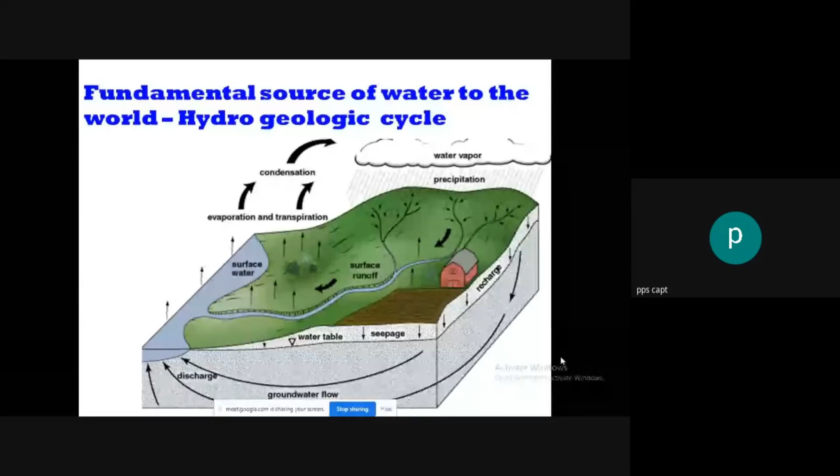Is there any audibility problem? No, sir. Continue. Audible.

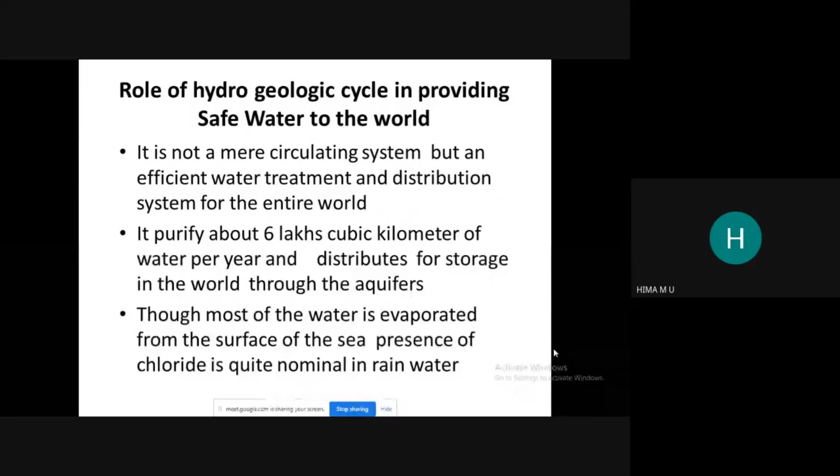Okay. Role of hydrogeologic cycle in providing safe water to the people. This is a different perspective. Actually, it is not a mere circulating system. Generally, we study it as evaporating water from the surface of the earth, and we are getting it as rainfall. That is our basic perspective. But I am giving a different perspective that it is not a mere circulating system, but an efficient water treatment and distribution system for the entire world. I hope it is easy to understand.

Whatever water is evaporated from the surface of the sea and by transpiration, it is being distributed all over the world. It is a pure purification. What we are getting as rainfall is pure water, whereas what we have in the sea has a lot of salts. It purifies about 6 lakh cubic kilometers of water per year and distributes it for the complete world through aquifers. During the rainy season, we are getting rainfall, and the rainfall is stored in the aquifers that we consume during the summer season.

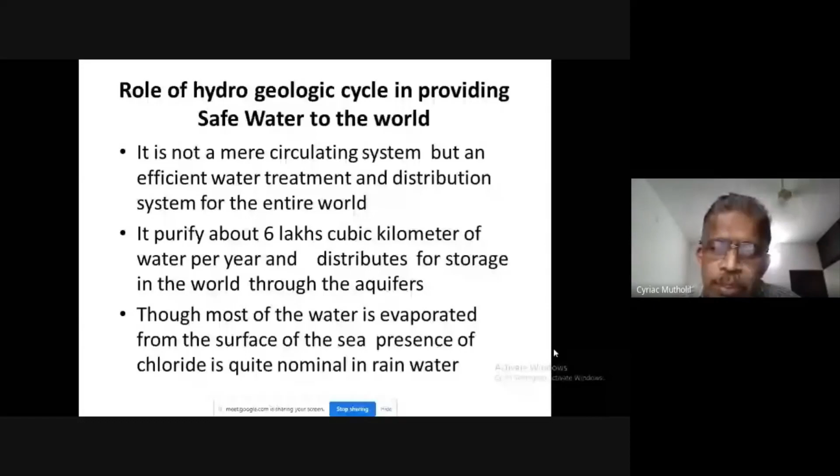So most of the water evaporates from the surface of the sea. The process is quite known. Even though the seawater has a lot of salt, what we are getting is fully deprived of any salt. These are the aquifers. Nature is storing the water in the aquifers.

And finally, I like to say that the hydrogeologic cycle is one of the most prominent processes, without which existence of life on Earth is not possible. It's a very, very important aspect. If there is no water in the world, it cannot survive. There will not be any life on Earth. It is invariably a gift of nature.

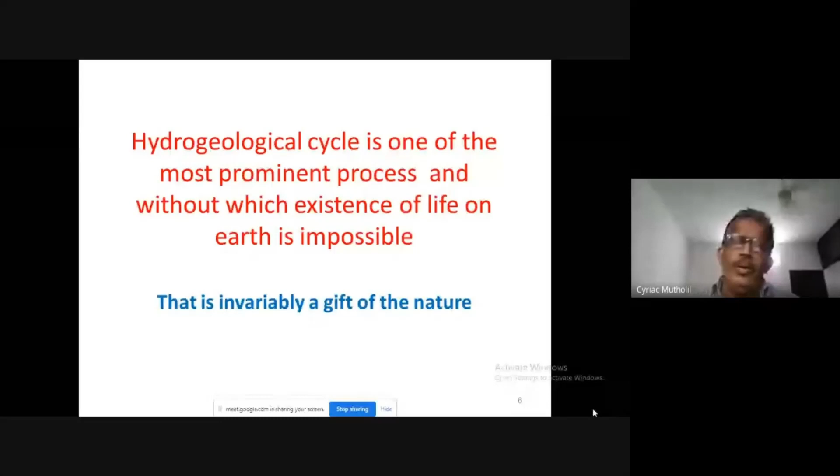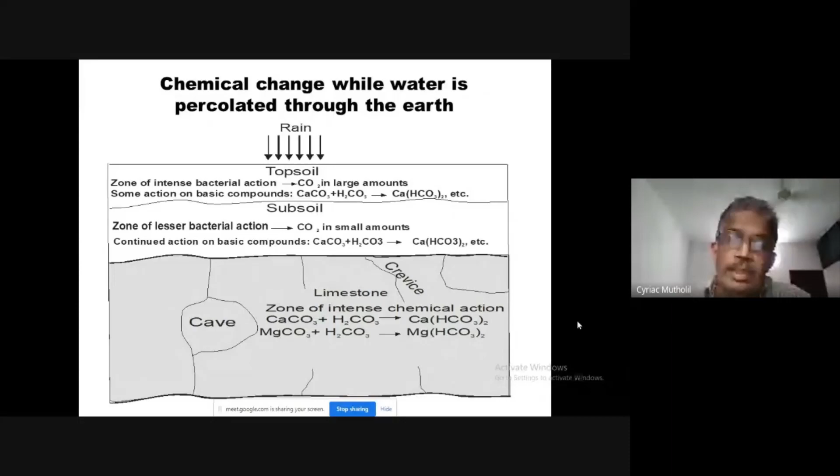In the top layer, calcium bicarbonate is formed. In the second layer also, the same activity takes place, but to a lesser extent. There also we can see that carbon dioxide is there, and calcium carbonate, carbonic acid, calcium bicarbonate. When it goes still below, the same chemical reaction takes place: calcium carbonate and carbonic acid give calcium bicarbonate. And from this figure, you will be able to understand that it contains a lot of calcium bicarbonate and magnesium bicarbonate.

Initially, it is acidic because of the carbonic acid present, but as it percolates down, it is being consumed. The pH will be more, the hardness will be more, and all the minerals dissolved from the earth will be more. But in the surface water, it will be less. I invite all of you to pay attention to this. We will be discussing this again.

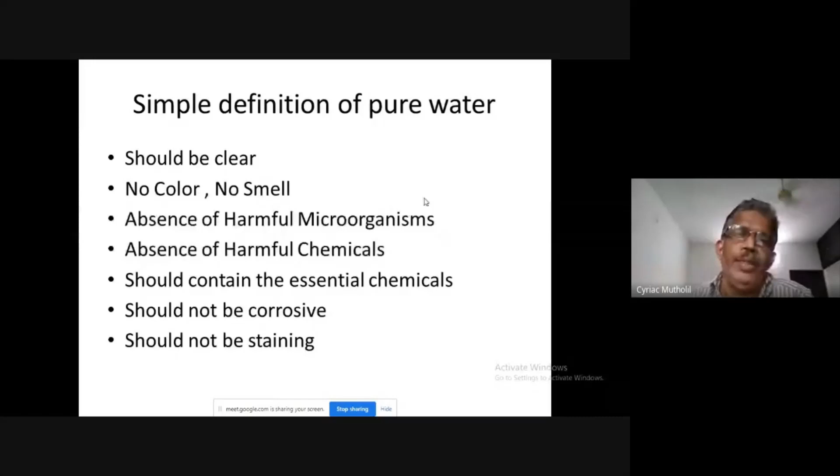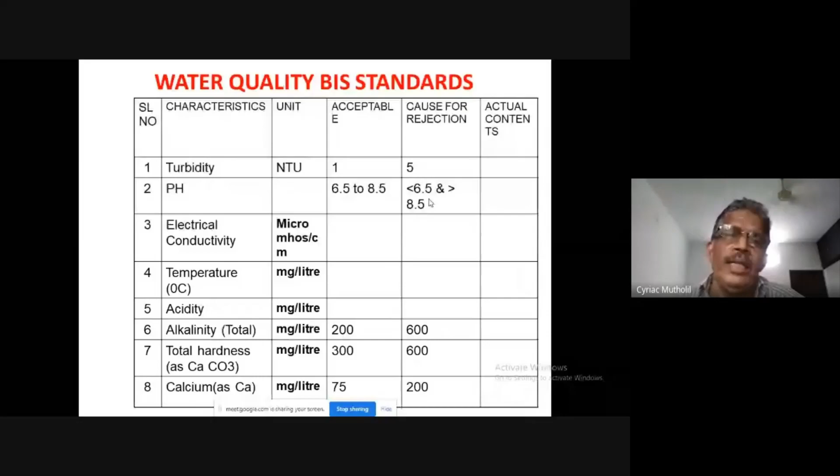And based on this, we have water standards by various organizations. This is the BIS standard. What we intend is the water should satisfy all the conditions. Then only it will have the quality as this. I'm not going deep in. I hope you are aware about this. So I'm not going deep. The issues that we face all over the world are shortage and pollution.

Oh, hello. Sorry, video on off.

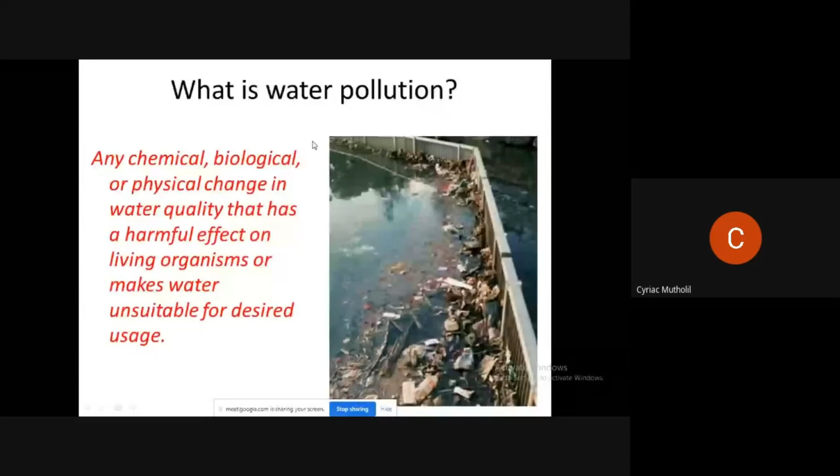And because of the pollution, the quality of the water will change. Because the quality of water will change, physical changes will be there. Changes in the physical quality of water, such as color, taste, turbidity, etc. Physical quality will be changing, and the chemical quality will be changing in chemical characters such as hardness, fluoride, chloride, nitrate, arsenic, iron, etc.

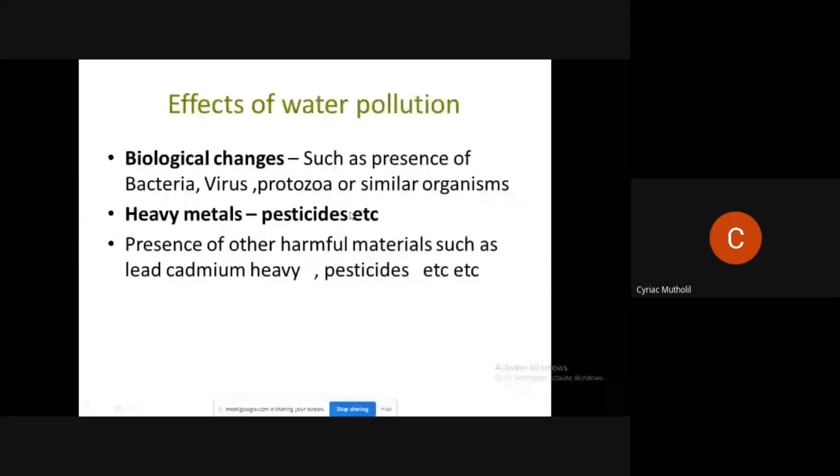Also biological changes such as presence of bacteria, virus, protozoa, or similar organisms, and also heavy metals and pesticides. All those things will be coming in the water. So the water quality parameters are divided based on this. Water quality parameters means physical parameters, chemical parameters, biological parameters, heavy metals, everything is there. And this is the general scenario of water. This I have taken from a presentation slide.

Every 8 seconds, a child dies from a water-related disease. 1.8 million children die each year from diarrhea. 4,900 deaths each day. For children under age 5, water-related diseases are the leading cause of death. At any time, half of the world's hospital beds are occupied by patients suffering from water-related disease. India loses 90 million days a year due to waterborne diseases, costing rupees 6 billion in production losses and treatment.

After economic calculation, what they say is that every rupee invested in water and sanitation gives an average of rupees 6.80 in returns. Why we are telling like that is, if you are spending money on water treatment and water sanitation, you are able to save a lot of money. That is, for every 1 rupee we spend, we are able to earn rupees 6.80 as returns.

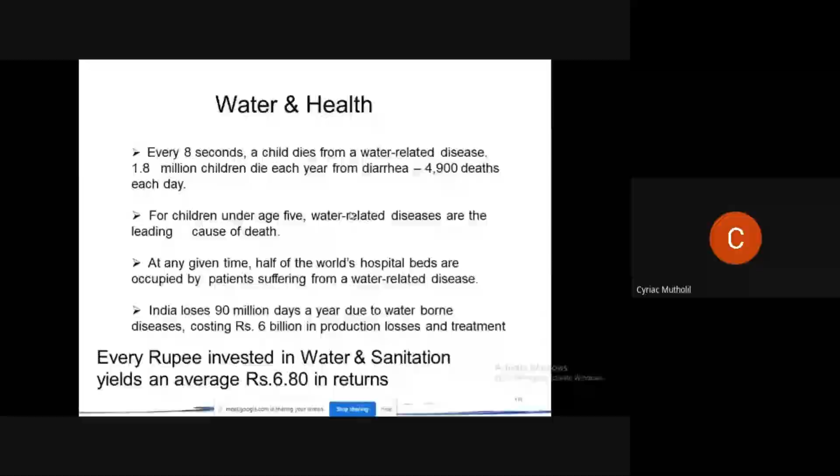Then now we can see some critical water quality issues that are causing problems. Here I would like to say that some of the water quality issues are apparent. Apparent means they can be sensed by our sense organs. For example, these 4 are not in that category.

Microbial pollution is generally tested for coliform. Coliform presence cannot be identified by our sense organs. Fluoride cannot be identified by our sense organs. Nitrate also cannot be identified. Arsenic also cannot be identified. All these 4 are serious water quality issues.

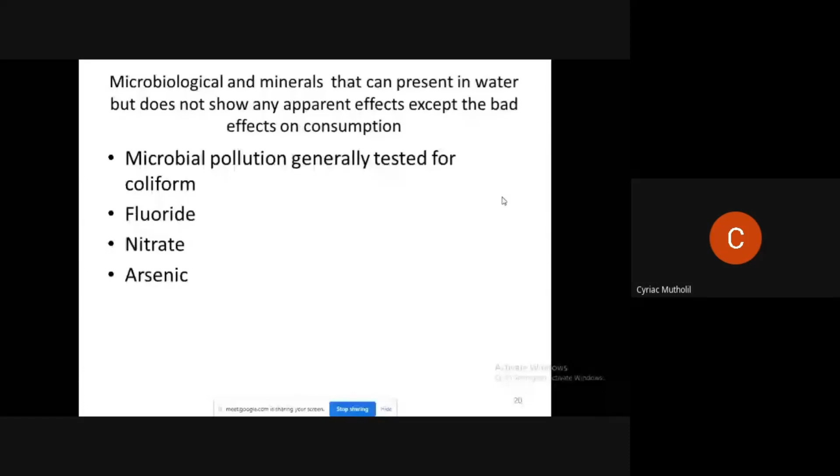You are familiar with the waterborne diseases, the various diseases: waterborne diseases, water-washed diseases, water-based diseases, water-related insect vector diseases. All of you are familiar with these, I think.

Then next is fluoride. Fluoride presence is very serious in many parts of our country. Because of the continued consumption of fluoride in water, fluorosis is caused. There are 3 types of fluorosis: dental, skeletal, non-skeletal. Here you can see that the teeth of this child have a yellow color. This is a mild form of fluoride attack.

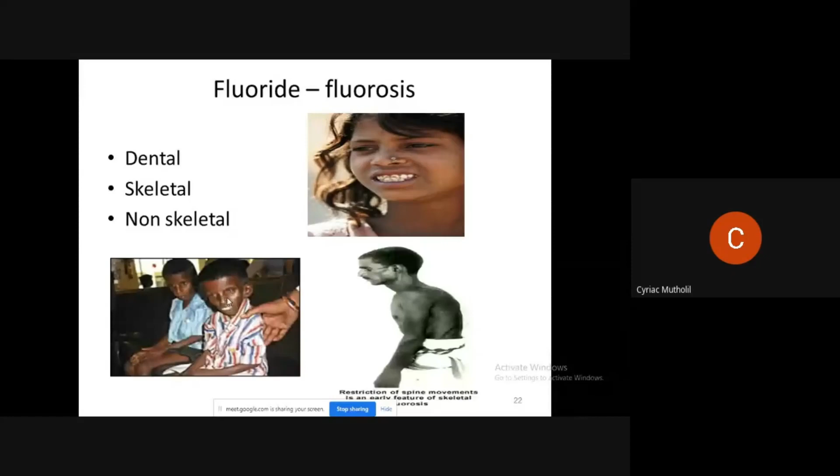Here it is skeletal. It is affecting the skeleton, and you can understand it from his shape. This is non-skeletal. There is no problem for the bone, but they appear to be very, very weak. In our country, mainly Rajasthan, Gujarat, Andhra Pradesh are very much affected. In Kerala also, Alleppy and Palakkad districts are affected by fluoride.

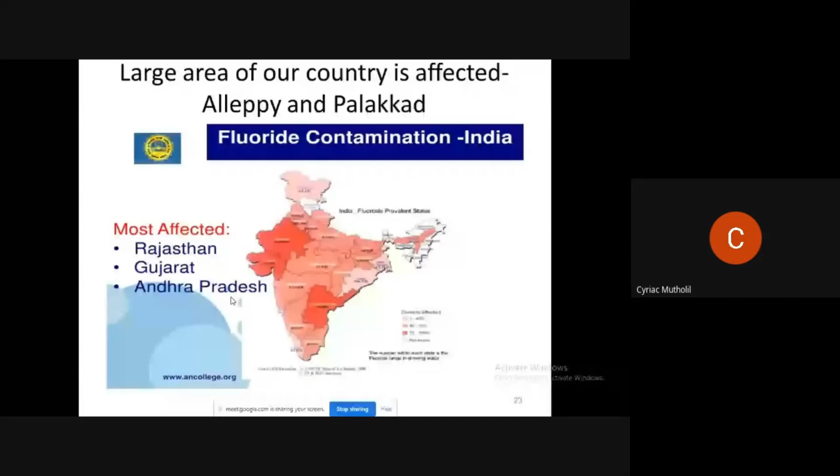Then nitrate. If nitrate is present, nitrate as such is not harmful, but it dissociates into nitrite and oxygen. Then nitrite combines with hemoglobin in blood and forms methemoglobin, which reduces the oxygen carrying capacity of blood. If you are consuming water containing nitrate, there is a possibility of this problem.

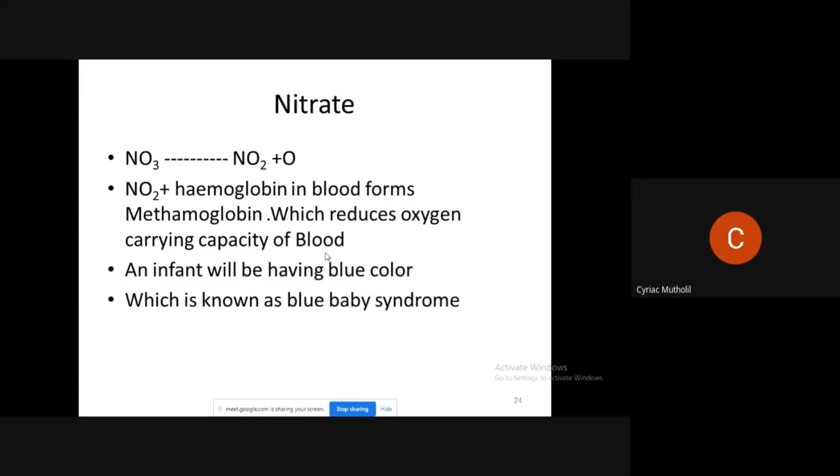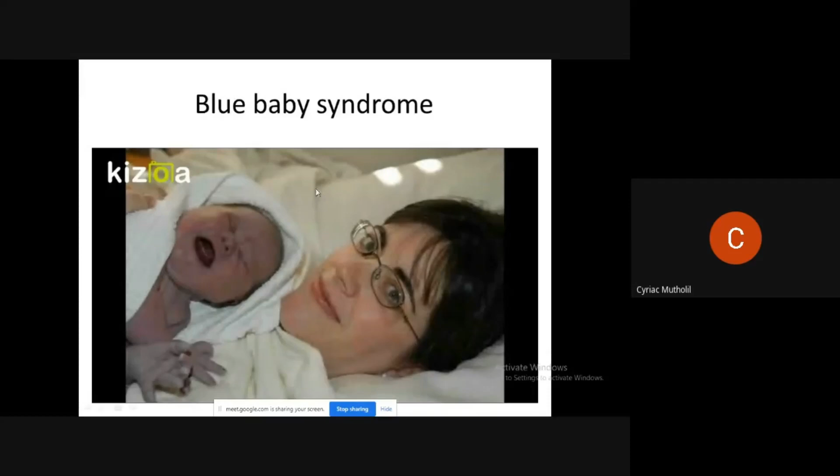An infant will have a blue color. When a child is born, it will have a blue color. And normally, such a child may not survive, which is popularly known as blue baby syndrome. So you can see that the lady is very white, but the child is blue. This is a typical case. Even for grown-up people, the same problem can be there; he will become weak, but he may not die.

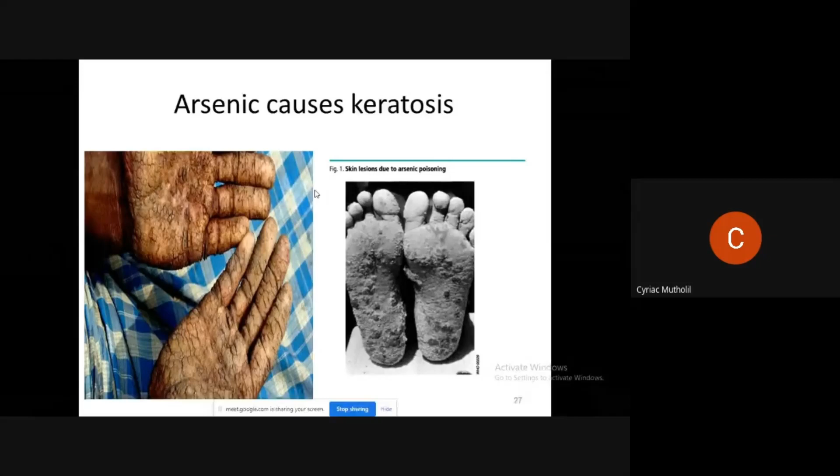Then arsenic is also another serious issue. You can see the palm, the hand; such issues will come due to arsenic. And it can cause more serious issues. In India, some places, West Bengal especially; Kerala, Maharashtra, Kashmir, Uttaranchal, some areas are the only exceptions. In all the other areas, arsenic issues are there.

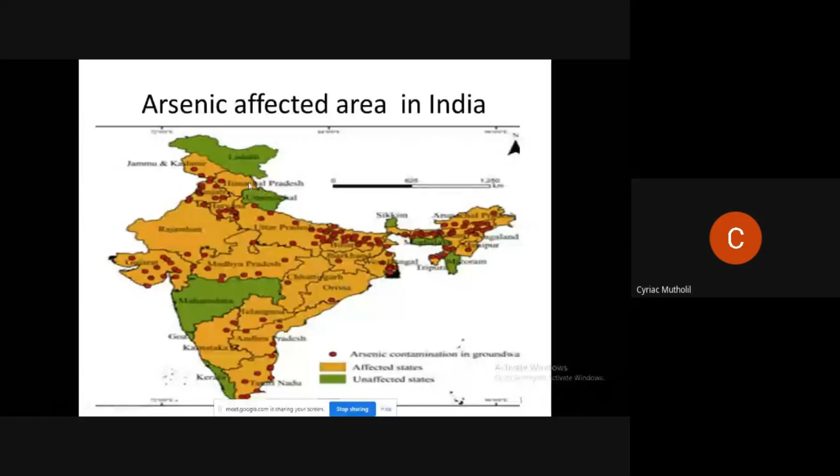Then we are going to the domestic water quality issues. As I told you earlier, my purpose in this class is to make you familiar with the domestic water quality issues, and I will be discussing the various remedial measures. I hope this will benefit you, because when you face some water quality problems, you will be able to solve it.

Anida, kekkan prashnam Anida? Sir, no, sir. Anida, clear alle? Continue, sir. Yes. Audible, sir.

Domestic water quality issues are presence of bacteria. We test for bacteria using an indicator organism. Generally, you might have seen in newspapers that coliform is high in some area. Coliform is only an indicator organism. Variation in pH value, low pH and high pH. I have shown you one picture in the beginning. When we collect water from a borewell or deep sources, we get high pH water. When we collect water from shallow sources, we get low pH.

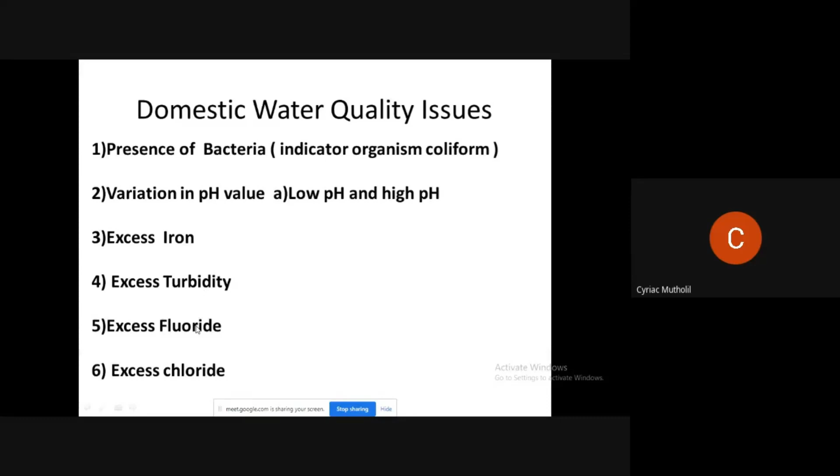Excess iron, excess turbidity, excess fluoride, excess chloride, pollution due to organic matter, excess hardness, excess arsenic, growth of algae. These are the commonly seen water quality issues. We are discussing mainly these, because I hope within the short time you will get some input.

Then coliform, presence of coliform. Coliform is a group of bacteria present in human excreta. It is selected as an indicator organism. We assume that if coliform is present, the water is contaminated with human excreta. It comprises about 10% of all the bacteria in human excreta. In water analysis, it is used as an indicator of the presence of human excreta in water.

What we normally assume is that when water has coliform present, it is contaminated with human excreta. Coliform is present in more than 80% of water sources. The issue is that in more than 80% of our water sources, coliform is present. This is the shape of the coliform.

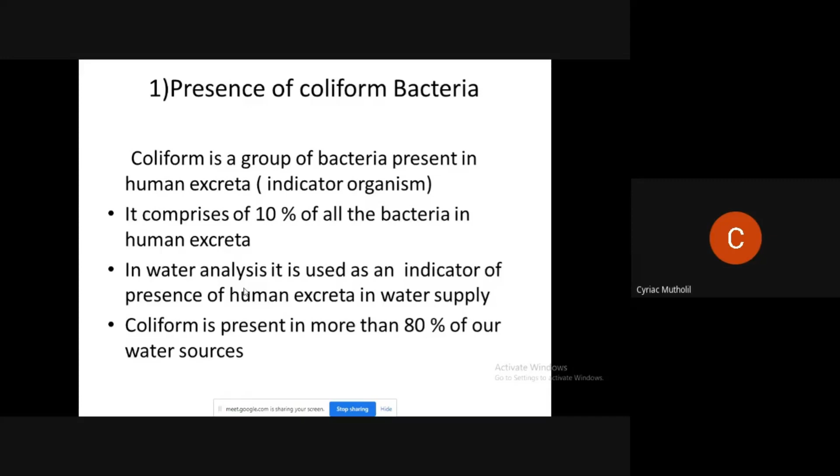Then the reason for selecting coliform as an indicator. Coliform is selected just as an indicator. A person may have cholera, but normally in a normal laboratory, we do not go for analysis of cholera, because analysis of cholera is dangerous.

Reason is that if there is any escape, it can create trouble. So coliform is not having any such issue. So when we analyze and understand that coliform is present, we can presume that water is contaminated with human excreta. Then we can go for remedial measures.

Out of all the bacteria in human excreta, it is long-lived. The reason for selection is that it's long-lived, and the analysis is simple. In all the small laboratories, and even with small kits, the analysis can be done easily. But coliform presence is regarded as poor water quality.

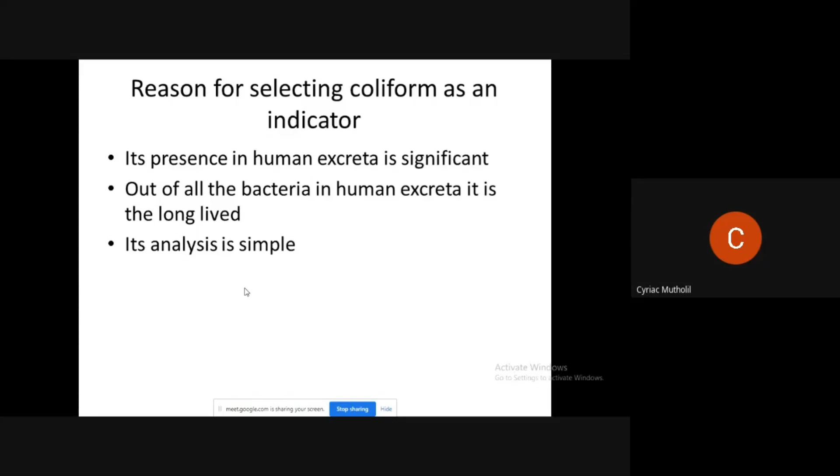Then limitation of coliform as an indicator. In addition to human beings, it is present in the excreta of all warm-blooded animals. It will be present in the excreta of dog, cat, everything. A strict indicator should not reproduce after discharging into the surface, but in favorable conditions, coliform reproduces.

Strictly speaking, the coliform should not multiply after reaching the earth, but coliform has such a character that it can multiply. Treatment of coliform is effective disinfection. The simple treatment that we can adopt is disinfection. Whenever we are consuming water, we have to use some disinfection method: chlorination, UV rays, etc.

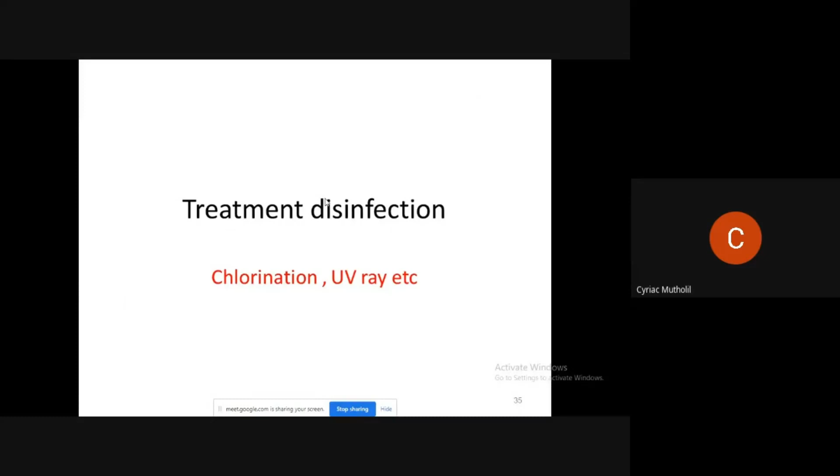So here, what we can easily assume is that low pH will be at the top of the surface. And on analysis, it is confirmed that about 60% of the well water samples are having low pH. The minimum limit for pH is 6.5. It will be less than 6.5 in more than 60% of the well water samples.

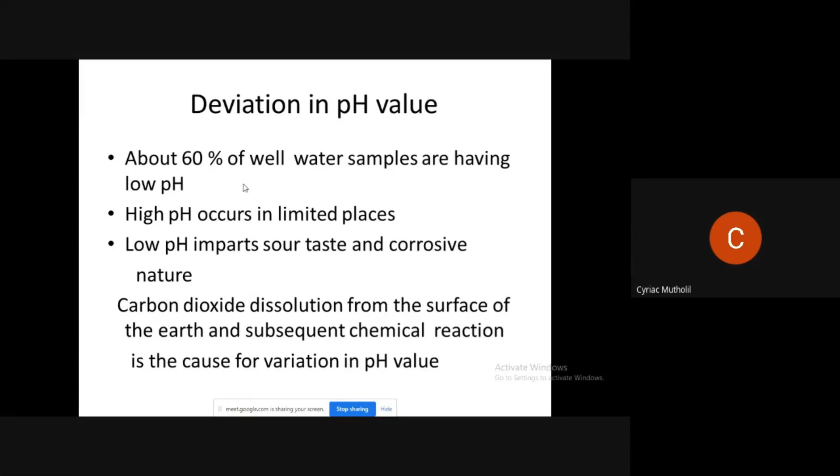Generally, this study was conducted in our state. High pH occurs only in limited places. Low pH imparts sour taste and corrosive nature. Low pH means corrosive nature. Carbon dioxide, that's already explained. This is the apparent effect.

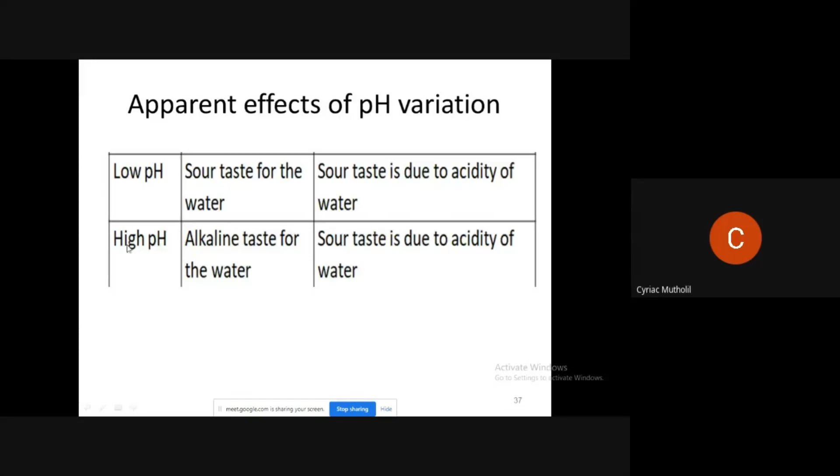Low pH means sour taste for the water. Sour taste is due to acidity of the water. High pH, alkaline taste for the water. It's again this picture.

Then water quality variation. As I have explained mainly about the pH, when we are collecting water from the bottom of the earth, it will contain many other things because of the dissolution of various minerals while the water is percolating from top to bottom. When you collect water from a borewell and from a surface well, open well, the quality will be entirely different. The borewell water will have more pH, more dissolved minerals, and like that.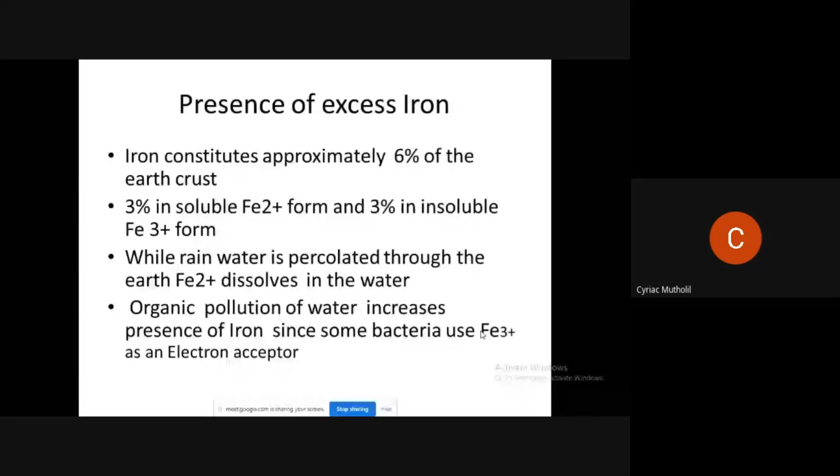Iron is the most disturbing water quality issue. Many of you may be familiar with it in your houses. Iron's first apparent effect is a change in color when exposed to the atmosphere. Normally, during the percolation of water through the earth, Fe2+ gets dissolved into the water. When it is pumped to the top, a reaction takes place: Fe2+ plus O2 plus H2O. When there is contact with oxygen, this reaction takes place and Fe(OH)3 is formed. Fe(OH)3 being formed means Fe2+ is converted to Fe3+.

People may say that after taking the water from the well, the color is changing. Some people complain that when we take the water from the borewell and keep it for some time, the color changes. Excess milk is required to prepare tea of the required flavor. Whenever we prepare tea, we want the tea to be fine. But when you prepare tea with iron-containing water, the taste will be different, the color will be different, and it will not have the required quality.

The reason is that tannin is a chemical in tea. Iron plus tannin gives a black color, which results in poor quality tea. I have experience with this type of water quality issue. When people drill a new borewell and prepare tea from that water, they complain that the tea is not good.

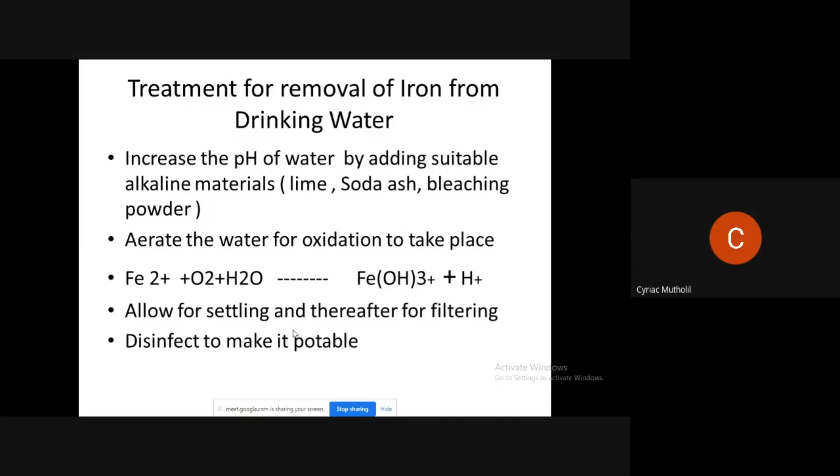It is so intensive that they may sometimes even close the pipe. The growth of iron bacteria is very predominant. I have seen such issues, because iron is a very disturbing water quality problem. But for iron, we have never noticed any serious health issues.

Disinfection should be done. Otherwise, even after the treatment, there will be growth of iron bacteria. So what we can do is mix the top of the well with bleaching powder and lime thoroughly, and you can do it today. And by tomorrow morning, in most of the cases, the water on the top will be fine. Then you can raise the foot valve, and then we can pump.

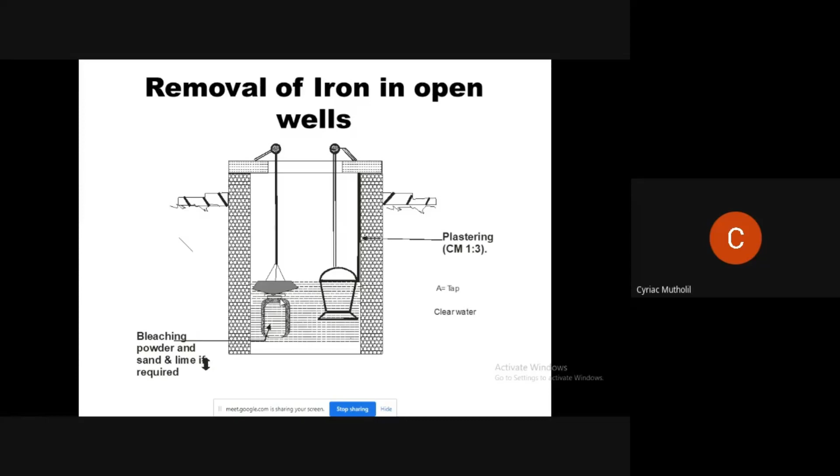But after the treated water is over, again the same problem will come. People are doing it. Some people do this in the evening, and by morning they will be getting good water. And the same thing can be done in tanks. If you are having a tank, you can add some chemicals for pH correction. Then we can wait for some time, and it will get settled. But the thing is that it takes some 12 to 15 hours for getting a reasonable settlement.

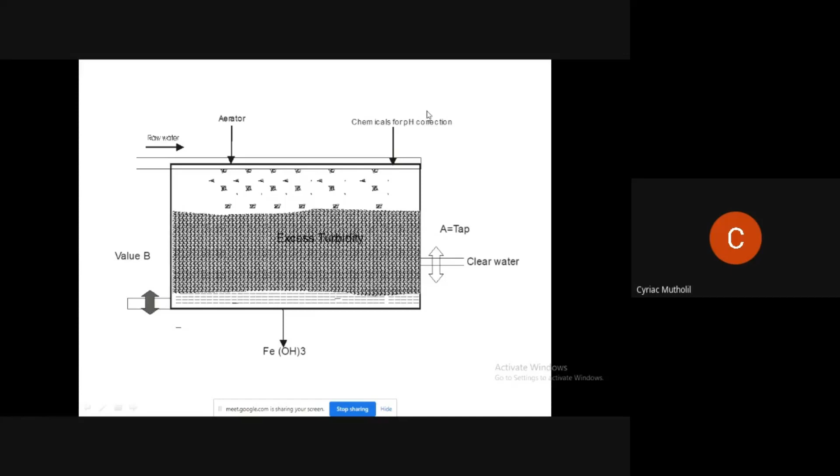Clear? Okay. And there are a lot of companies which are selling iron removal filters. What they are doing is using the same principle which I have mentioned earlier, that is, to increase the pH and then aerate. For small systems in our house, there is no need to aerate. It's not possible. Aeration is done for big systems. Here, what we can do is add some lime in your tank and wait for 12 or 15 hours, which varies slightly depending upon the type of water, then the iron will get settled.

And there are also so many filtering methods, so many technologies. This is such a technology. If you tell a person who is delivering this type of filter, they will bring it and show you, and they will take the responsibility. Only thing is that we have to be very cautious, because the treatment is not very well defined. If the pH is not properly increased, the oxidation may not take place properly, and the expected result may not be obtained.

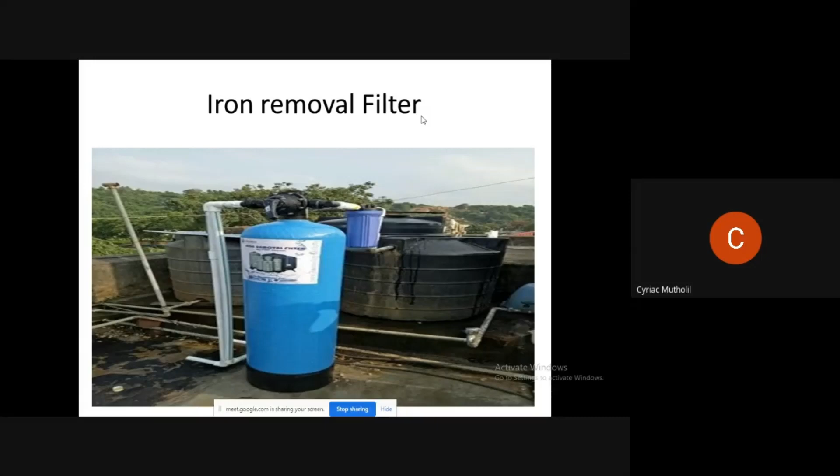Then excess turbidity. In some water, there will be turbidity. Regarding wells, the water quality in a well largely depends upon the soil surrounding the well. When the rainfall comes, as I told you earlier, it will be collected in the aquifer, and when you pump from the well, the water will rush towards the well. If the surrounding soil is not good, naturally, it will have turbidity. Treatment for turbidity is sedimentation, coagulation, filtration. Such conventional methods we have to go for.

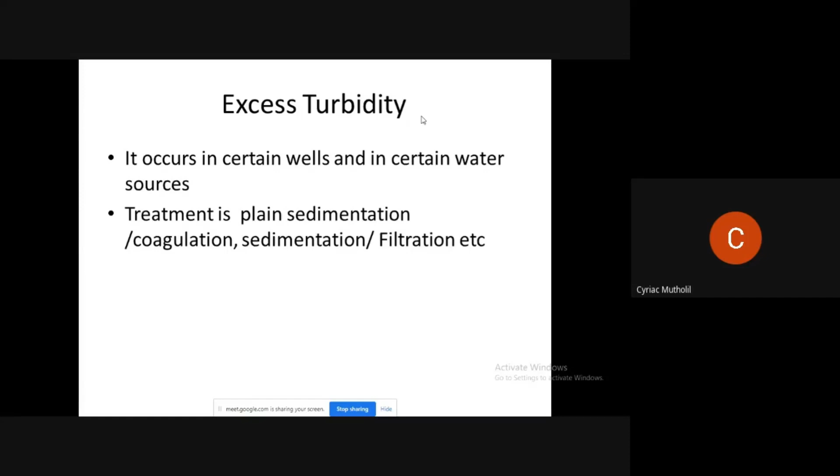Even sedimentation, by keeping the water in a tank for a long time, it will get sedimented. Or you can add some coagulants, some alum. You might have heard that by adding alum, coagulation is possible. Then we can use filtration also. Lot of filters are available.

Then excess fluoride. We have already seen the bad effect of fluoride, but I have not explained the details. Fluoride is also generally coming from the crust of the earth. Fluoride presence will be more in water with less calcium. If calcium is present more in the water, fluoride will be less, because calcium has an affinity for fluoride. So if fluoride is dissolved from the crust and the water contains calcium, calcium fluoride will form and get deposited. In our state, Kerala, Alappuzha and Palakkad are having this type of problem.

And in many places, the government is supplying some kits. The peculiarity of fluoride is that it does not have apparent adverse effects like what we have seen with iron. This needs to be treated only for drinking and cooking. For taking bath and all the other purposes, fluoride does not cause any problem. Fluoride presence will not show any apparent effect either.

Domestic kit using activated alumina is suitable for removal of fluoride. It is available. It costs about 3,000 rupees. And when you find that your water is containing fluoride, you can use this kit, and it can be applied only for drinking water

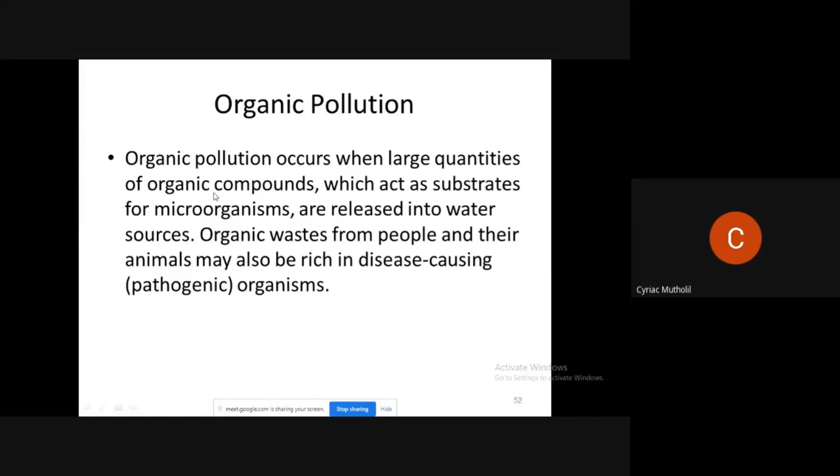Organic pollution. Organic pollution occurs when large quantities of organic compounds, which act as substrates for microorganisms, are released into the water source. It's a very serious issue, especially in places where the density of population is very high, and there are so many other types of institutions or establishments which discharge organic pollution. Organic waste from people and their animals may also be rich in disease causing organisms. Organic pollution is very much predominant.

One of the main apparent effects of organic pollution is the water will become black. The color will become black. And also fish normally will not survive. Smell will also be bad. Whenever you see any well, any water source with black color, you need to suspect that it is polluted with organic matter. So I advise all the people that whenever you are testing water samples, you have to insist for testing chemical oxygen demand or biochemical oxygen demand.

By testing chemical oxygen demand and biochemical oxygen demand in our laboratories, we will be able to identify the presence of organic matter. But testing organic matter using chemical oxygen demand is a lengthy process, and BOD is still lengthier. So generally the laboratories hesitate to test COD and BOD. But if you want to know the actual position of your water, even if there is no black color, you should demand for testing the COD or BOD.

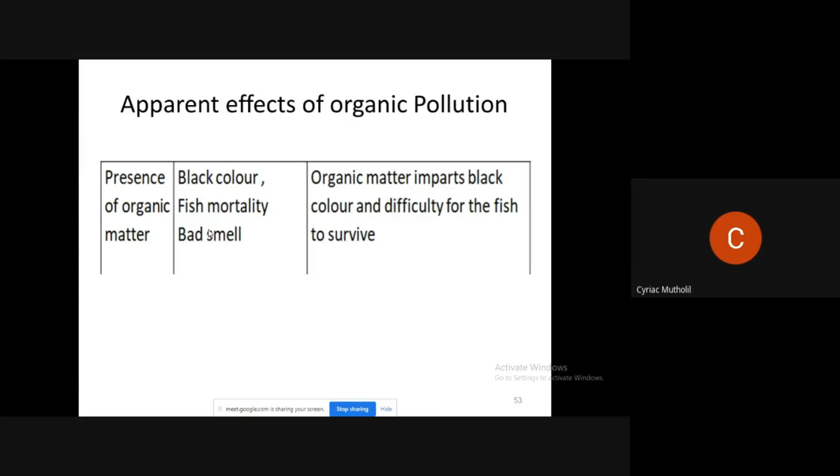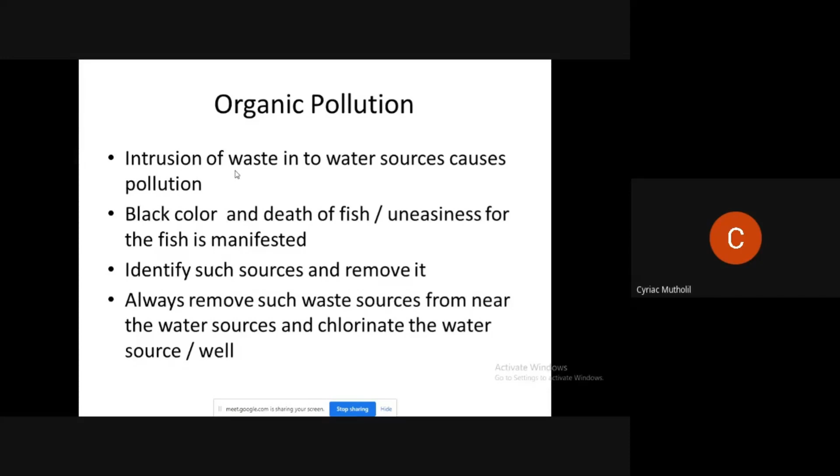Then organic pollution, the reason is intrusion of wastewater. The effects are black color and death of fish, as already explained. Organic pollution is a very serious issue. And along with organic matter pollution, there may be other pollution also.

Then presence of chloride in drinking water. All of you are aware that in coastal areas, intrusion of seawater is a very common phenomenon. In such cases, most of the wells in the coastal area may be having chloride intrusion. The commonly used method for removal of chloride is reverse osmosis, but it can be used for other purposes. Some RO units are being used in coastal areas of Kerala. And in Gulf countries, they are treating the seawater by using RO.

Then this is the Ghyben-Herzberg equation. This is a part of water resource engineering. Here, this is the ocean. Here, this is the fresh water and this is salt water.

Fresh water should be there. If fresh water is not there, seawater intrusion will be more. Here what I have established is that this is the line. You can see the sea level. Above the sea level, the height is HF, and there should be a height of 40 HF below. And all these should be fresh water. Then only the intrusion of seawater can be prevented.

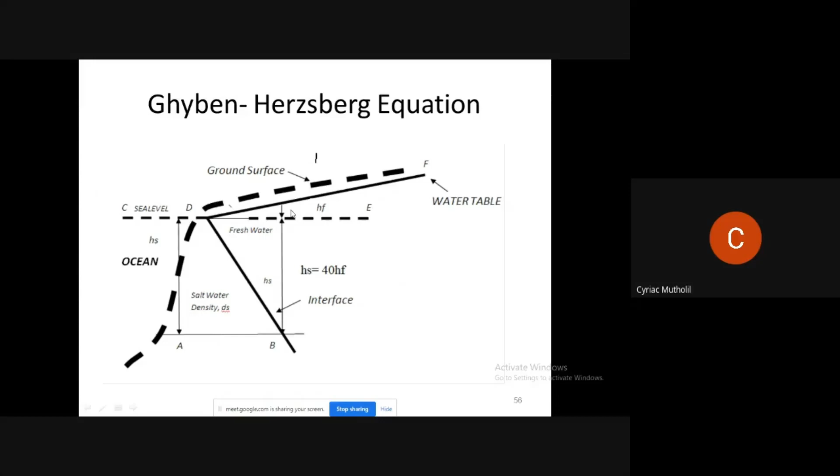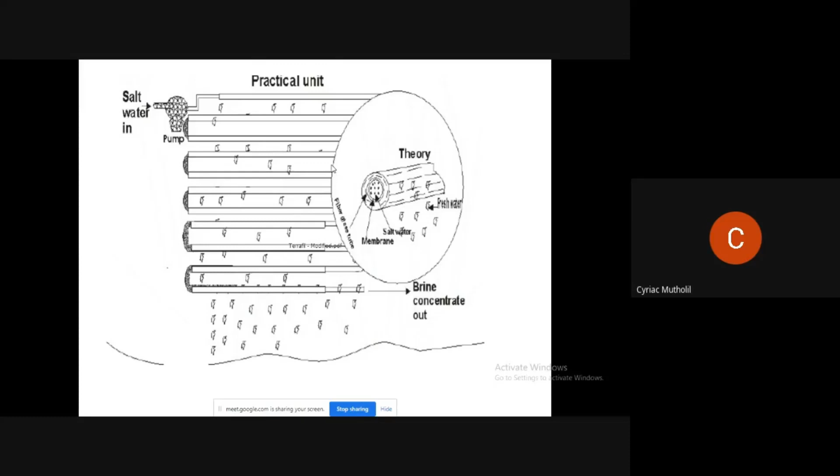The same thing I have included in many places. This is such a practical unit, which I have told you earlier. It is widely used all over the world. This is such a unit in Jubail, Saudi Arabia, 2,500 cubic meters per hour. It's a big unit. We are taking the figure of that. It's the same thing only.

Then hardness. Hardness is caused by multivalent metallic cations, mainly calcium and magnesium. Deep water sources are generally hard. I have shown you the picture and requested you to remember it. When this process takes place, calcium and magnesium at the bottom will be more. So when you are taking water from the bottom, hardness will normally be more.

Deep water sources are generally hard. If topsoil is thick, hardness will be more. The meaning is that if the topsoil is thick, production of carbon dioxide will be more, and this reaction will be more intensive. In such areas, hardness will be more. Softeners, equipment which removes calcium and magnesium, are commonly used for removal. There are many, ion exchange is there, but normally it is easy to get from the market. This is mainly RO softeners.

Hardness will be more in deep water sources like borewells. You might have experienced that in borewells hardness will be more. A certain percent of hardness in drinking water is considered good against heart disease. Studies in America and some countries have established that those who are taking hard water have less heart disease. It is documented in very famous books.

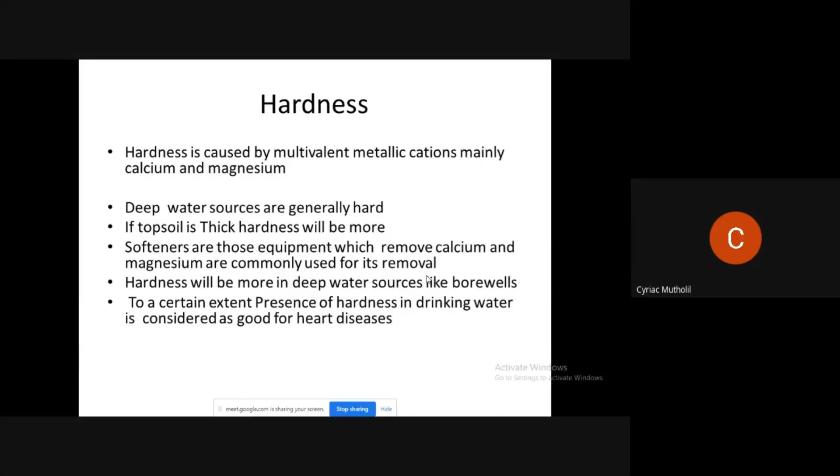The apparent effect of hardness is white deposit on boiling. When the water is boiled and there is white deposit, immediately you can assess that the water contains hardness. The reason is that on heating, calcium bicarbonate dissociates to form calcium carbonate, carbon dioxide and water. Calcium carbonate is the white deposit. Hardness is mainly caused by calcium bicarbonate, and when you boil it, it dissociates to form calcium carbonate, carbon dioxide and water, and the calcium carbonate is the white deposit.

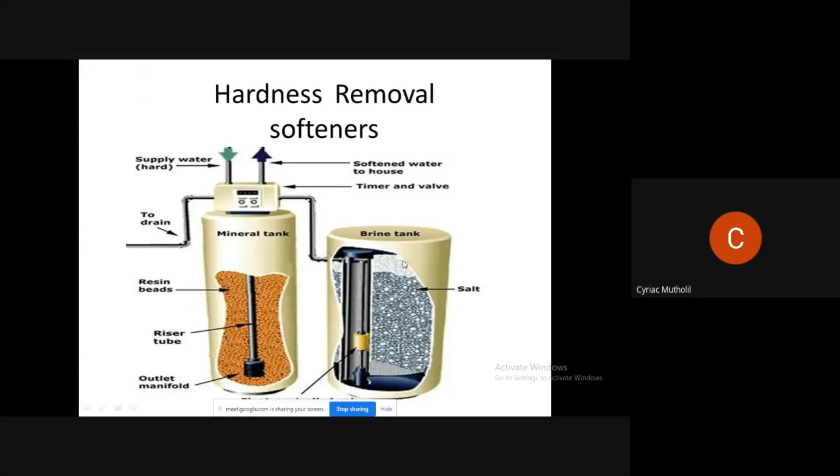This is hardness removal with softeners. Softeners are largely available. When water passes through this resin, calcium and magnesium are withheld. After working for a long time, it is to be washed with salt. This is 2 units. If you want to purchase, you will get both units together. We will be telling about the market in the coming slides.

Growth of algae. In an open well, in the morning the water is good, and when sunlight falls on it, the color changes. Such cases are there in many open wells where sunlight has direct access to the well. The water source gets polluted due to algae growth. Algae is a water plant which requires sunlight for growth. Algae is nothing but a water plant.

Just imagine you have constructed a tank on the top of your house. If you are not covering it, naturally what happens? After 1 or 2 months, it will become fully muddy because of the growth of algae. Birds will come there and bring the seeds of the algae. Algae starts growing because of the sunlight. Algae is merely a plant. Treatment for algae growth is prevention of sunlight, chlorine or copper sulfate. If sunlight is prevented, algae growth will not take place.

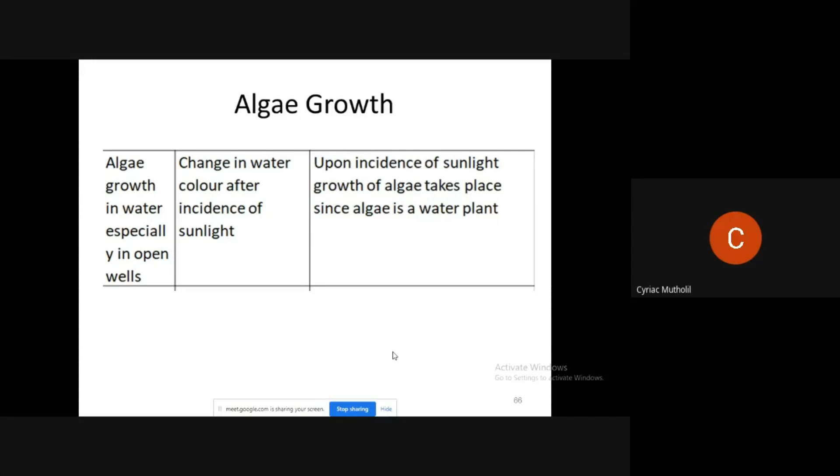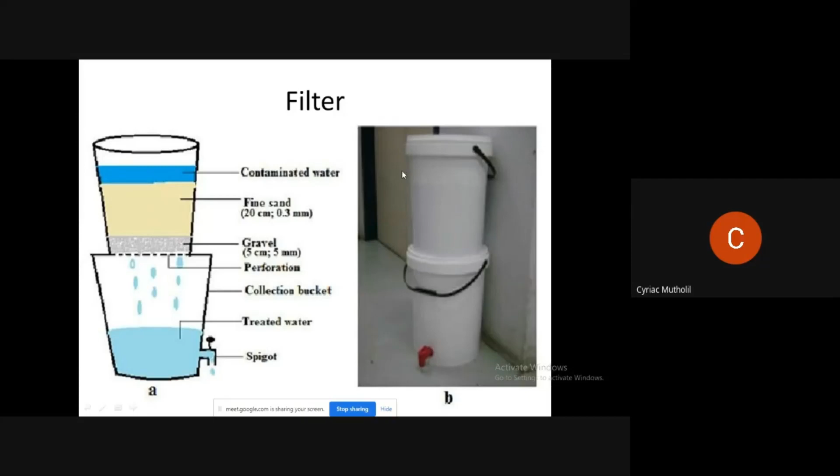Here, what is on top? It is fine sand. Fine sand is used for treating. Gravel is given in the bottom. In the bottom we will be getting treated water. Here we can pour the water. This will be the shape. This can be sold in the market also. We can get a lot of such filters in the market also.

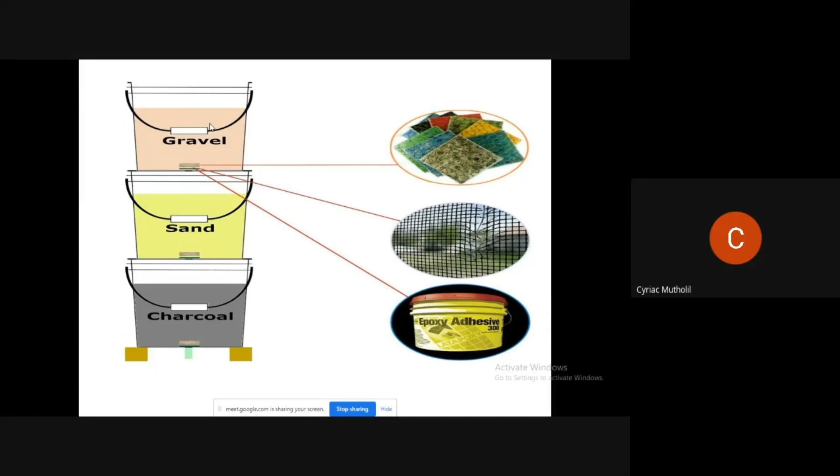Then this is another such filter: charcoal, sand, gravel. Charcoal or activated carbon is a good treatment method. When the capacity of treatment is less, we can make our own treatment systems by just using this method. It's also the same thing.

It's a commercial market. I will be just giving a brief account of the commercial market. The commercial market is very strong. There are a lot of companies which manufacture and sell water treatment equipment at the domestic level. Different types of models, lots of models. There is heavy competition between them. Whenever you want any treatment system that I have shown you, you can get it within a day. If it is near a city, everywhere they are having units and they will be selling.

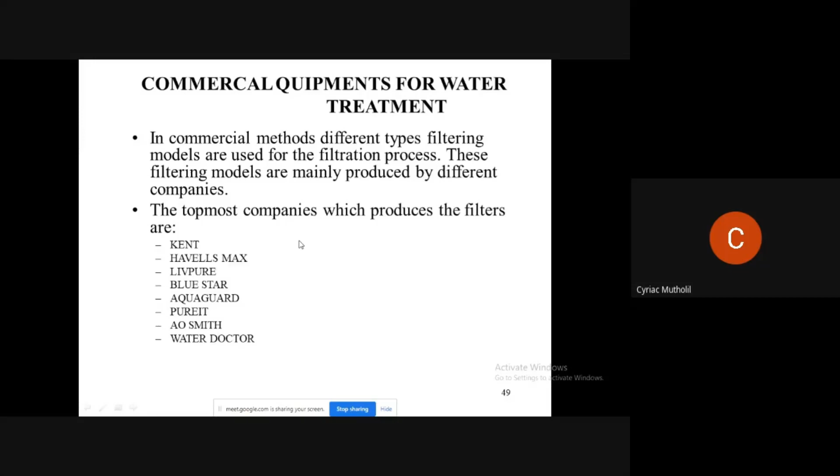These are some of the companies. Kent is a very popular company. Havells Max, Livpure, Blue Star, Aquaguard, Pureit, A.O. Smith, Water Doctor. So many. I am not giving any publicity to any companies. I have just given you some companies. That's all. This is commercial equipment for water quality issues. Different types of equipment are available in the market.

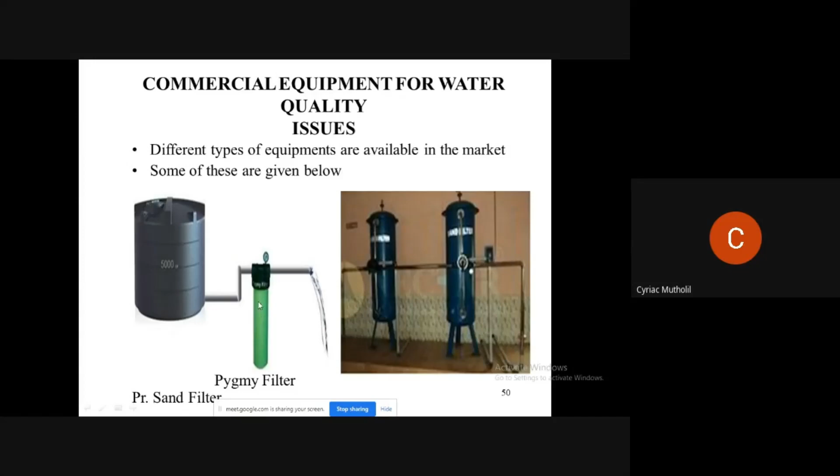Some of these are: this is called a Pygmy filter. From this tank, it will be coming here. You will be getting treated water. Then the pressure sand filter. So everything is available in the market. Whenever you are in need, you can just go to the market and tell them, or there will be a lot of phone calls, a lot of publicity. You can just go there, or if you tell them, they will bring it to your house and give it.

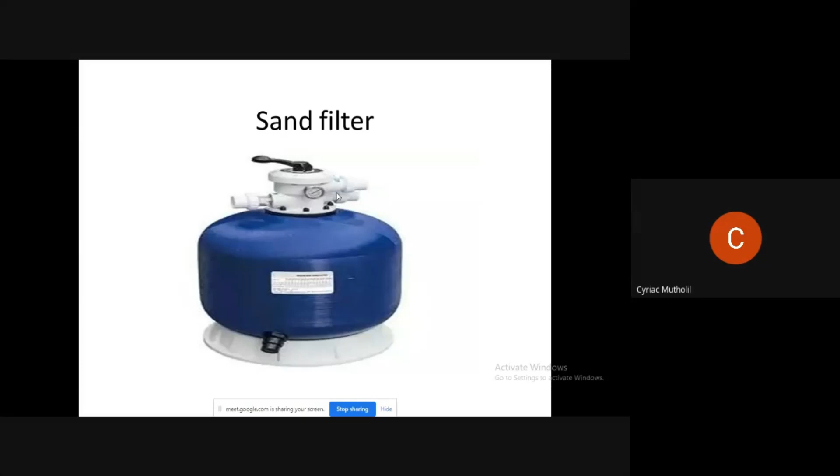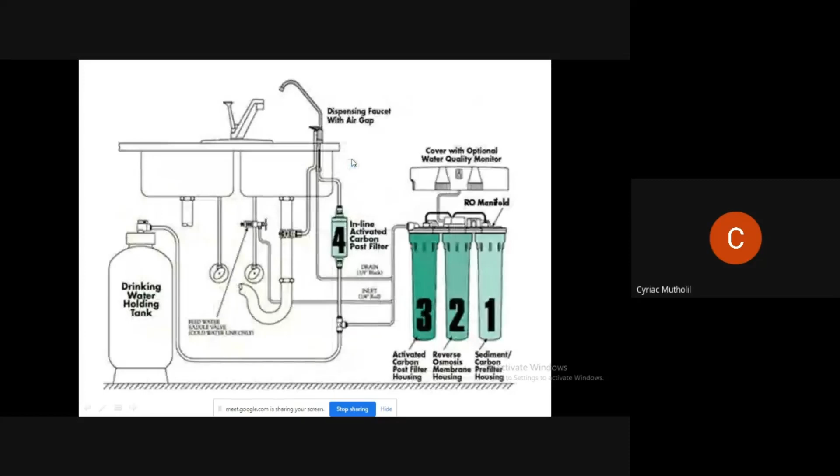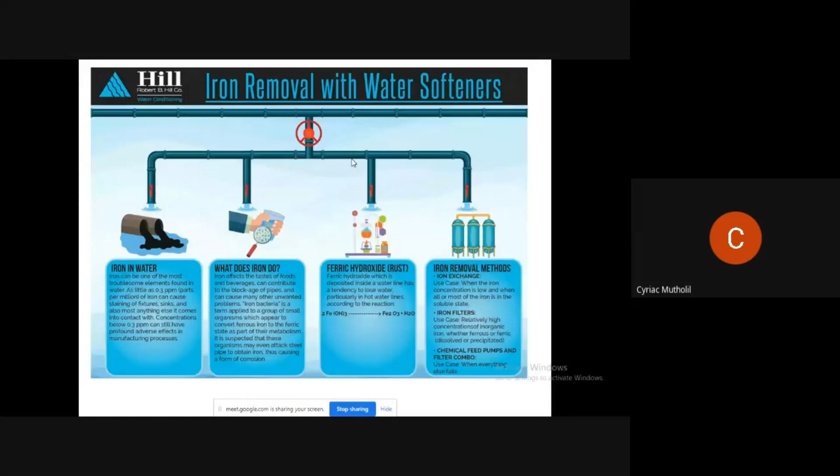Hardness removal, I already told you. Reverse osmosis. Even for iron removal, which we have discussed, some new methods are there. The fundamental principle of iron removal is what I told you earlier: we have to increase the pH by adding lime, we have to aerate the water, by which Fe3+ will increase. Then we can settle it or filter. That is the basic principle of all iron removal systems. So again, various types of iron removal systems.

Then we will discuss the strategy for water quality control. We have to adopt a strategy. As I told you in the beginning, water quality issues are very serious all over the world. Some of the water quality issues are not apparent. For example, coliform bacteria, fluoride, even chloride, arsenic, nitrate, those things are not visible. In the coming scenario, we have to adopt a different strategy.

One thing is to become conversant with the water quality of the area. We should have some idea about the water quality of the area. Adopt disinfection of drinking water; whatever you are drinking should be disinfected. Adopt testing of water sources, in case you have any doubt about the quality of the water, or you are staying in an area where there are a lot of water quality issues. There are a lot of agencies regularly testing water from various wells. The Central Ground Water Board, the state government water board, and the Kerala Water Authority are doing it. So many organizations, because of these issues.

Previously, the government of India made an attempt to test almost all water samples using test kits. What I am trying to tell you is that if any of the apparent issues are there, you should be able to identify them from my presentation. In other cases, you have to go for testing. At least once a year, try to test it. Adopt testing of water and proper maintenance of water sources.

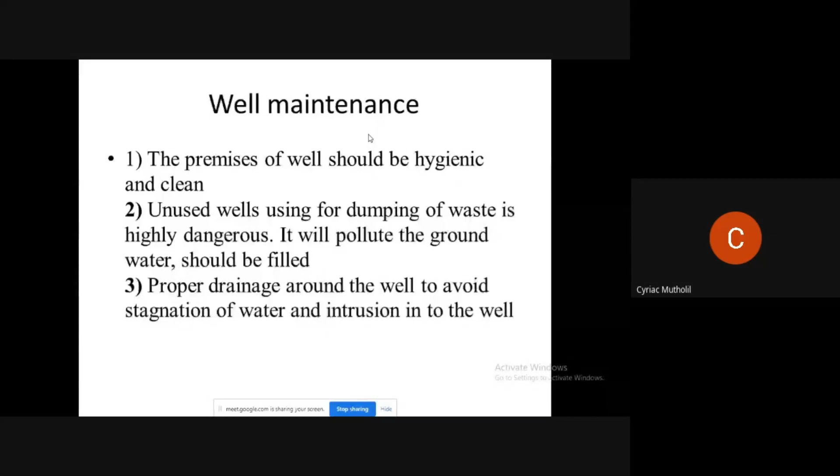Proper drainage around the well to avoid stagnation of water and intrusion into the well. The well should have a proper drainage facility. There should not be any intrusion of water into the well. That is a basic concept. The well should be in a slightly elevated position, and there should not be any storage of water. If the water is stored, it will intrude into the well and spoil the quality of the well.

The issue with a submersible pump is that it has high efficiency. So when it is pumping, the flow towards the well will be more. When the speed of flow to the well is high, there is a possibility of contamination, of percolation of muddy water into the well.

Avoid providing polluting sources near the well, especially upland. We have to be very cautious that in no case should we place the polluting source upland of the well. The reason is that from the upland there will be a flow towards the well.

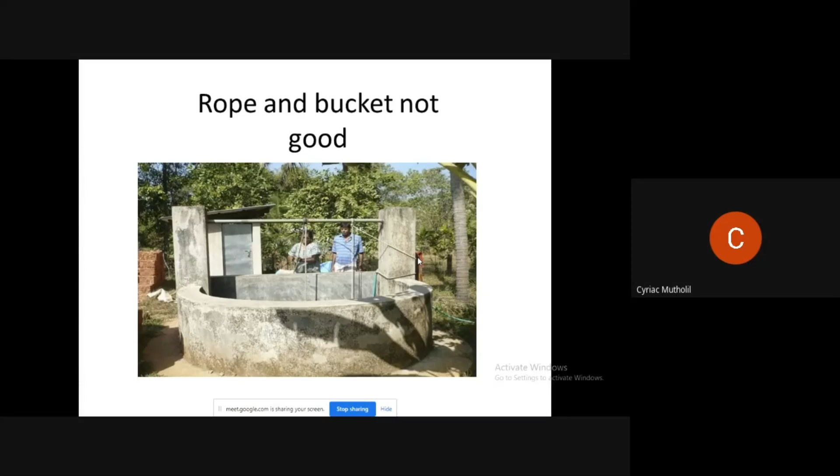Instead of that, you just use a motor. And whenever you are using a motor, we have to be very cautious to use only a small size motor. Let it take more time for pumping. Instead of taking 2 minutes or 5 minutes, you take 25 minutes. So that will be more safe. Well maintained.

Use septic tank. One of the important issues is to use a septic tank to dispose of human excreta, especially in waterlogged areas. In waterlogged areas, the disposal of excreta is always a serious issue. There you always use a septic tank. Avoid incidence of sunlight directly to the well, as it can cause growth of algae. Direct incidence of sunlight in the well may be avoided because there is possibility of growth of algae.

Do not put the foot valve at the bottom of the well. Generally, the practice is to fix the foot valve at the bottom of the well. Instead of that, use a flexible hose, so that the foot valve can be lowered or raised as per the fluctuation of water level. When the water level is coming up, you can raise it. When the water level is going below, you can lower it. Cover the well to avoid entry of other materials and algae growth. It is better to cover the well.

Liquid waste to be disposed through soak pit so that there is no ingress of wastewater into the well. One of the main core ideas is that whenever we are using a house, you need a water source. If you are taking water from a water supply system, the issue is not serious. But if you are having a well, a septic tank, a soak pit for disposal of wastewater, and some arrangement for solid waste disposal, all these things should be done in an environmentally hygienic manner so that the water source is protected. There are many methods.

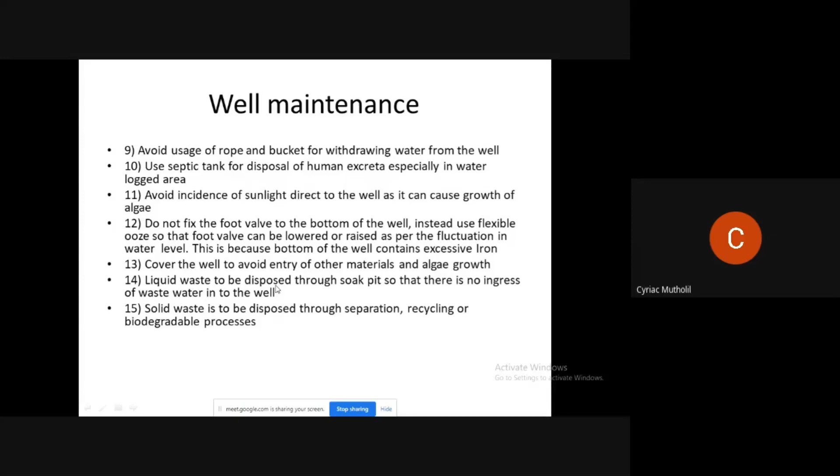Another idea is that whenever you are constructing buildings, there should be enough plants around the house. The reason is that inside the house, due to a lot of activities, production of carbon dioxide is high. So in order to absorb that carbon dioxide, we have to plant a lot of trees around the house. You are having only a small area, but if you are tiling the complete area and keeping it as such, it has an adverse effect. It is a primary requisite that you should plant trees around the house.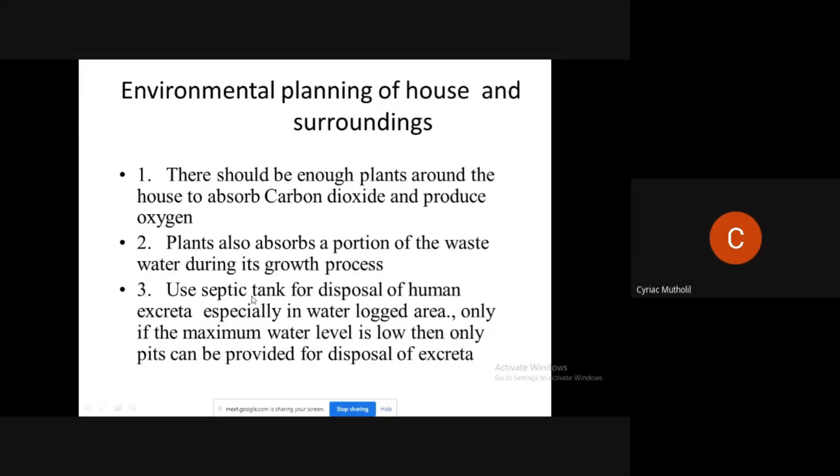Plants absorb a portion of the wastewater. It's also an advantage for absorbing the wastewater. This is a typical example. One is an eco-friendly house because there are a lot of trees. This is called an eco-friendly house. This is an eco-enemy house because there are no plants nearby.

Always ensure absence of organic matter in the well to avoid its ill effects. We have to be very cautious. That is why I told you earlier that whenever you are testing water, we have to see that the water does not have any presence of COD or BOD. If it has COD or BOD, it indicates the presence of organic matter. Along with organic matter, there can be a lot of other pollutants also.

Liquid waste is to be disposed through a soak pit so that there is no ingress of wastewater into the well. All of you may be familiar with the soak pit. A soak pit is nothing but a small construction. Whenever you are constructing a building or residence, we need to construct a soak pit. Solid waste.

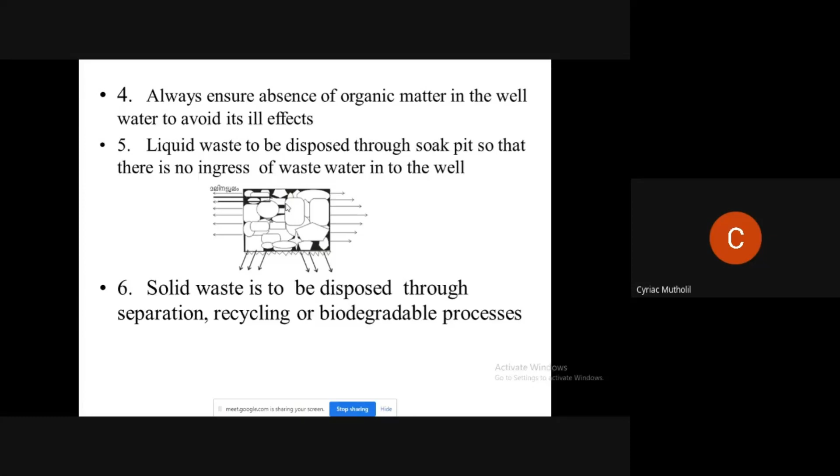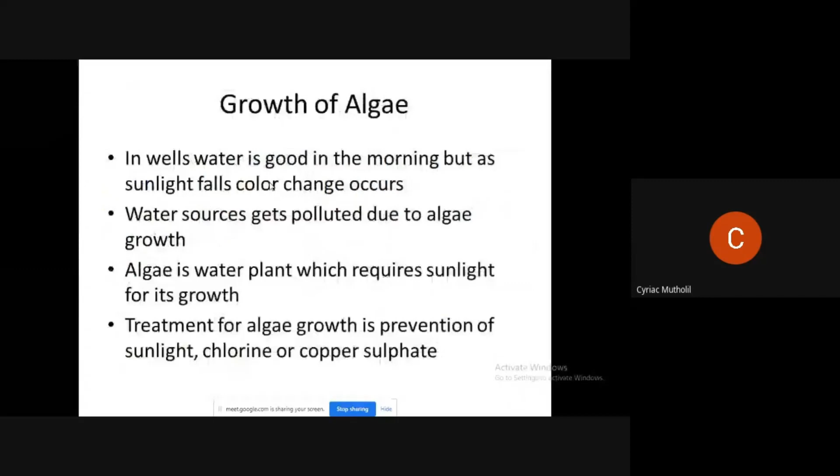If the water level is always up to the top, and in this area we are disposing all our waste, that is the issue in a waterlogged area: the water level will be up to the top. So whatever waste you are disposing in this area will be intruded into the well. If the water level is very low, there will not be any such issue.

But when the water level is very low, the various minerals dissolved from the earth will be more. There are two cases: the top and the bottom. At the top, organic matter and other pollutants that we discharge will be more. But at the bottom, many minerals dissolved from the crust of the earth will be more. That's the reason why I told you that in bore wells, iron, fluoride, chloride, all those things will be higher. But in shallow open wells, there is possibility of organic matter and the pH will be low.

That's the reason why I told you that in open wells, 60% of the wells are having low pH. The reason is that at the top, only if this reaction takes place, calcium carbonate plus carbonic acid giving calcium bicarbonate, the pH will increase.

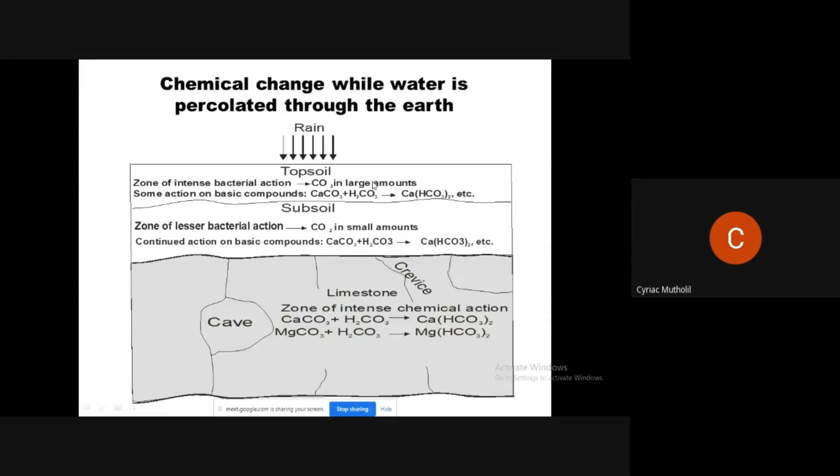Once upon a time, I encountered a well where the depth is not very high, but the hardness is more. When we went deep into it, it was gathered that the height of the topsoil is more. Because this height is more, production of carbon dioxide is more, and the reaction takes place extensively, so the conversion is more. So what we got: the waterlogged areas are really dangerous.

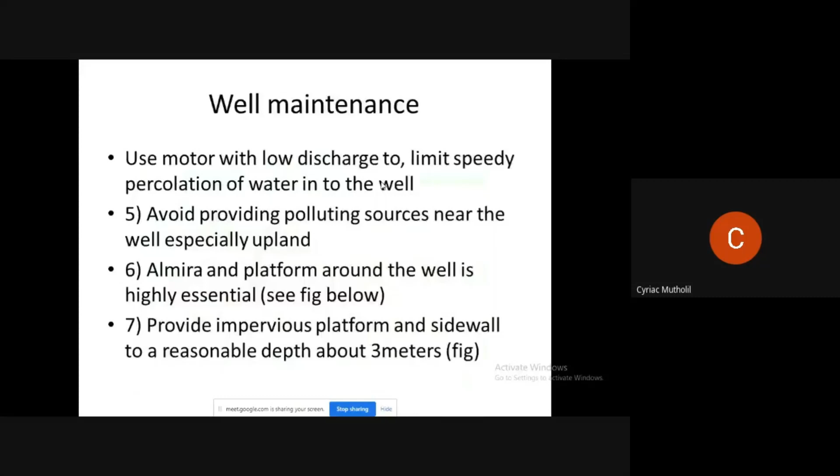This is waterlogged area. I have just classified based on the intensity of pollution. For waterlogged area, we have to be more cautious. The reason is that in waterlogged area, the possibility of organic pollution is more.

Coastal area, the main issue is seawater intrusion. As I told you, when you are pumping more water from the coastal area, the intrusion will be more. In coastal area, rainwater harvesting should be done more. In that case, coastal area can be protected from intrusion.

Then the other thing is thickly populated urban area, towns and cities. When you are staying in a thickly populated urban area, if you are getting sufficient water from the water supply system, it is well and good. If it is not there and you are having only a well, the possibility for pollution is more. In many places in Kerala, most of the panchayats are like towns. In urban areas, now the scenario is that a good number of the wells have been polluted with organic matter.

Thickly populated rural area also, the problem will be more, but compared to urban thickly populated areas, it is less. Industrial area, like Ernakulam and all, we have to be more cautious because the issue with the industrial area is the presence of heavy metals. Depending upon the area and the type of industry which discharges heavy metals, there is possibility of more heavy metals.

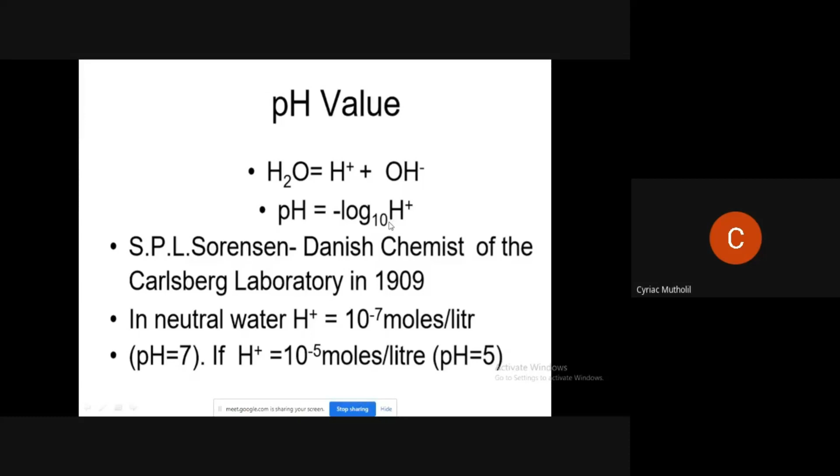The reason is that H2O dissociates into H plus and OH minus. In any water, a small quantity of H2O will be dissociated into H plus and OH minus. The H plus ion has a significant effect on the quality of the water. So S.P.L. Sørensen, a Danish chemist of the Carlsberg Laboratory, defined pH as the negative logarithm of the H plus ion concentration to the base 10. And these things are familiar to you.